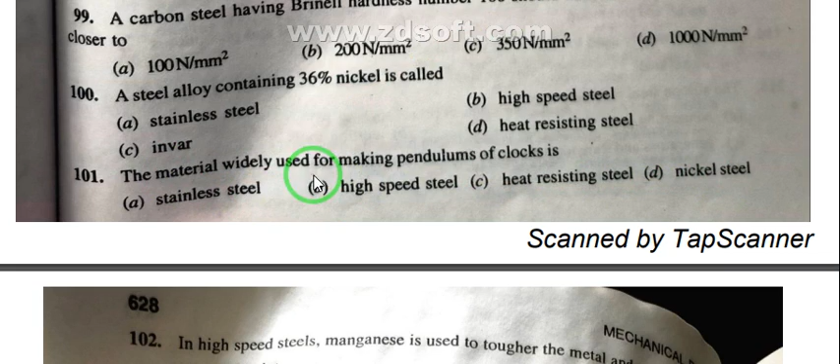In high speed steel, if we use manganese, it is used to toughen the metal and to increase its yield point, critical temperature, melting point, or hardness. The right answer for 102 is B, that is critical temperature. In high speed steel, manganese is used to toughen the metal and to increase its critical temperature.

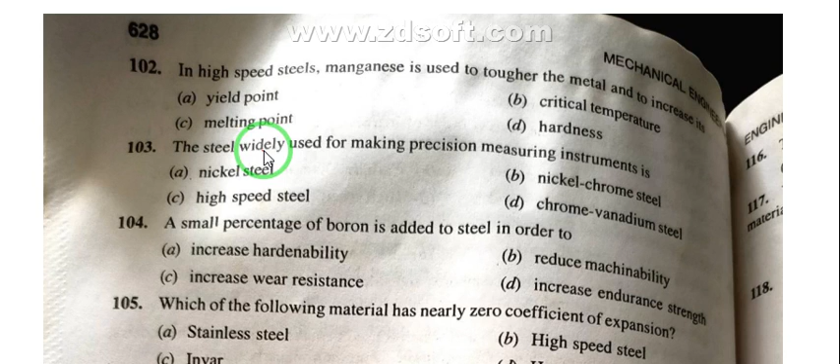Next question 103: the steel widely used for making precision measuring instruments is. Which one is it? It is nickel steel.

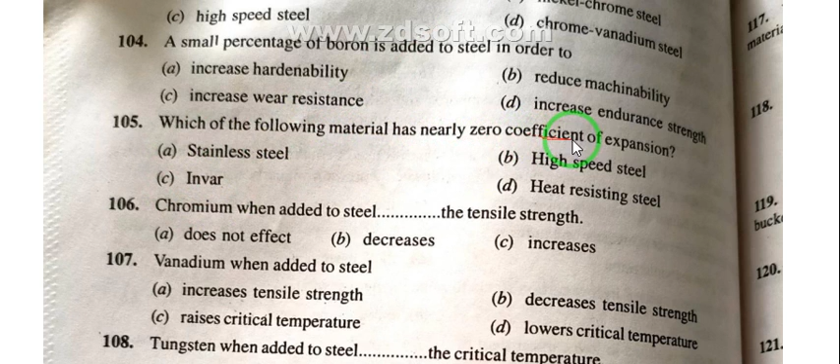105: Which of the following material has nearly zero coefficient of expansion? Options are stainless steel, high speed steel, invar, or heat resisting steel. The right answer is C, that is invar. Which of the following material has nearly zero coefficient of expansion? That is invar.

Question 106: chromium when added to the steel - the tensile strength does not affect, decreases, or increases? What happens when we add chromium? The right answer for 106 is C, that means increases. If we are adding chromium to steel, then the tensile strength increases.

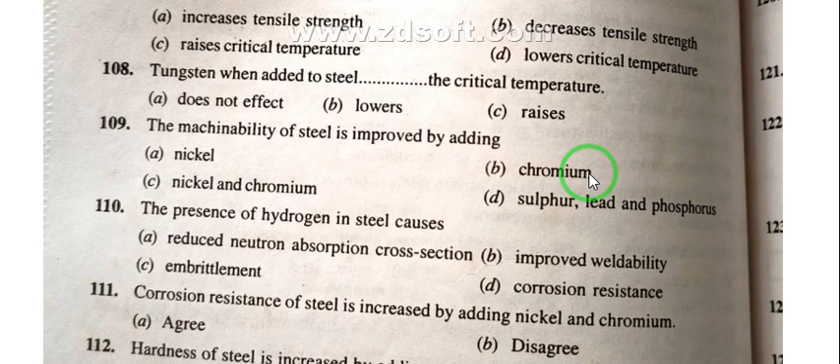Question number 110: the presence of hydrogen in the steel causes - what? Reduce neutron absorption cross section, improve weldability, embrittlement, or corrosion resistance. The right answer for 110 is C, that is embrittlement. Presence of hydrogen in steel causes embrittlement.

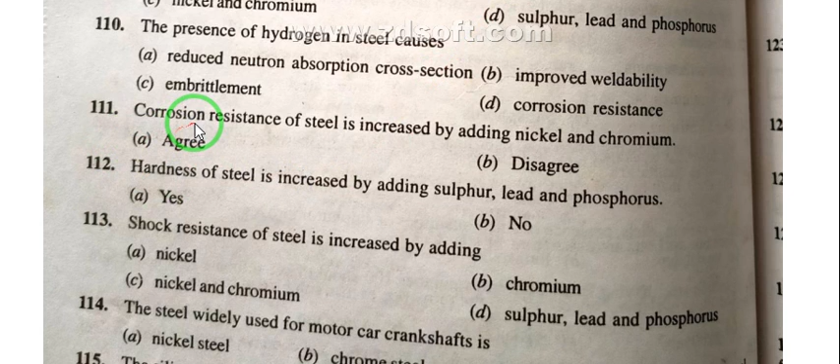Question 111: corrosion resistance of steel is increased by adding nickel and chromium - agree or disagree? The right answer is A, that is the statement is agree, meaning corrosion resistance of steel is increased by adding nickel and chromium.

Question number 112: hardness of a steel is increased by adding sulfur, lead and phosphorus - yes or no? The right answer for 112 is B, that is no.

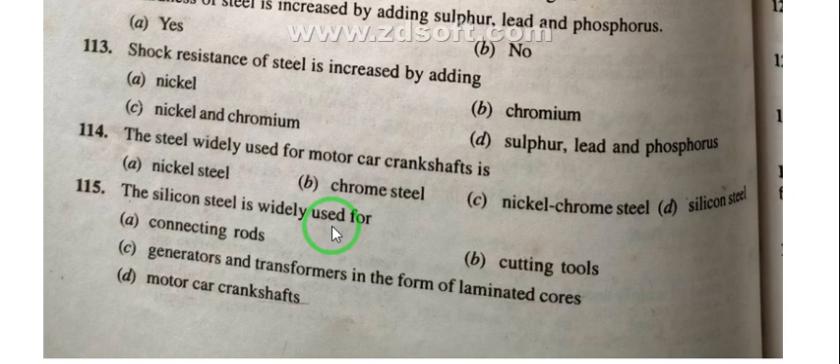Question number 114: the steel widely used for motor car crankshaft is - nickel steel, chrome steel, nickel chrome steel, or silicon steel? The right answer for 114 is B, that is chrome steel. The steel widely used for motor car crankshaft is chrome steel.

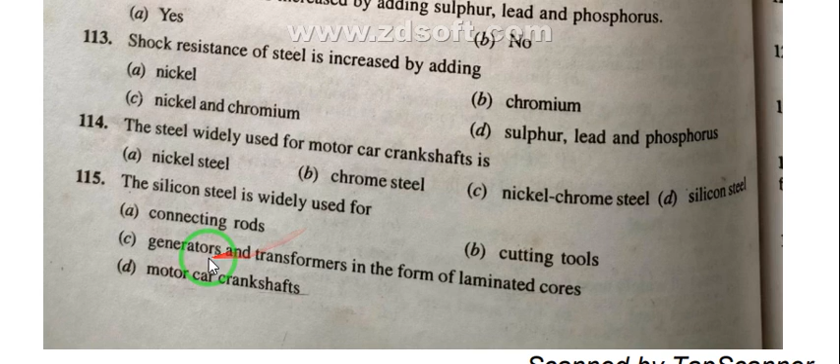Question number 115: the silicon steel is widely used for - what is it used for? Connecting rods, cutting tools, generators and transformers in the form of laminated cores, or motor car crankshaft. The right answer for 115 is C, that is generators and transformers in the form of laminated cores. The silicon steel is widely used for generators and transformers in the form of laminated cores.

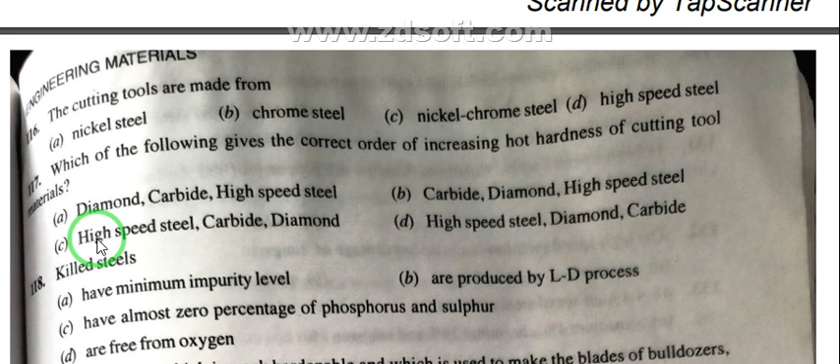Question 117: which of the following gives the correct order to increase the hot hardness of cutting tool materials? The right answer is C: first high speed steel, then carbide, then diamond.

Question 118: killed steels have minimum impurity level, are produced by the LD process, have almost 0% phosphorus and sulfur, and are free from oxygen. The right answer is D: killed steels are free from oxygen.

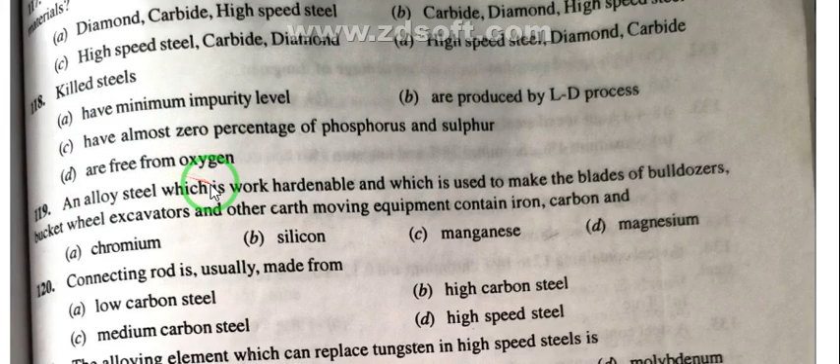Question 119: an alloy steel which is work hardenable and used to make the blades of bulldozers, bucket wheel excavators and other earth moving equipment contains iron, carbon and what? The right answer is C: manganese. So iron, carbon and manganese.

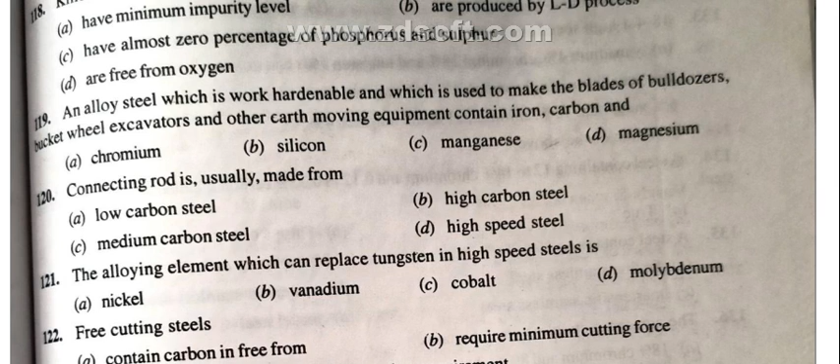Question 120: connecting rod is usually made from low carbon steel, high carbon steel, medium carbon steel, or high speed steel? The right answer is C: medium carbon steel. Connecting rod is usually made from medium carbon steel.

Question 121: the alloying element which can replace tungsten in high speed steel is? The right answer is D: molybdenum. The alloying element which can replace tungsten in high speed steel is molybdenum.

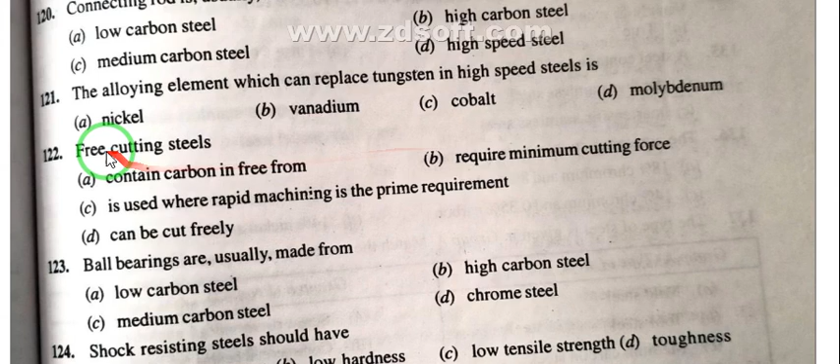Question 122: free cutting steel contains carbon in the free form, requires minimum cutting force, is used where rapid machining is the prime requirement, or can be cut freely. The right answer is C: free cutting steel is used where rapid machining is the prime requirement.

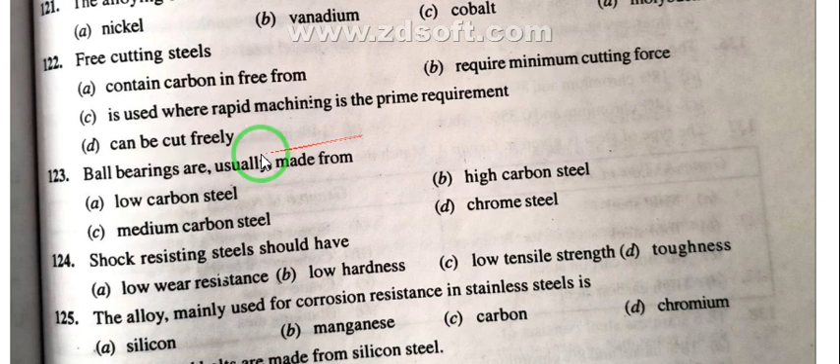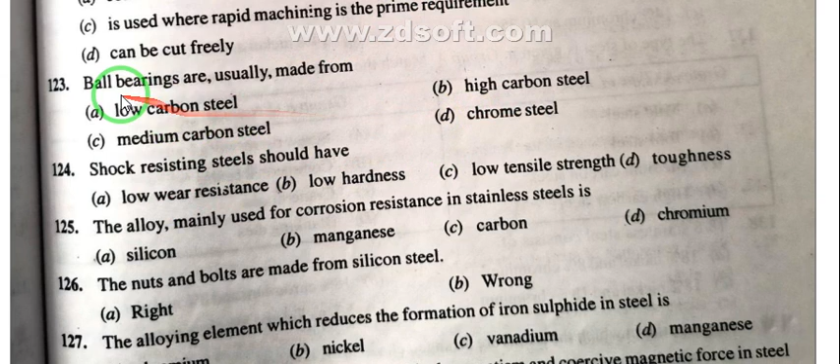Ball bearings are usually made from low carbon steel, high carbon steel, medium carbon steel, or chrome steel? The right answer is D: chrome steel. Ball bearings are usually made from chrome steel.

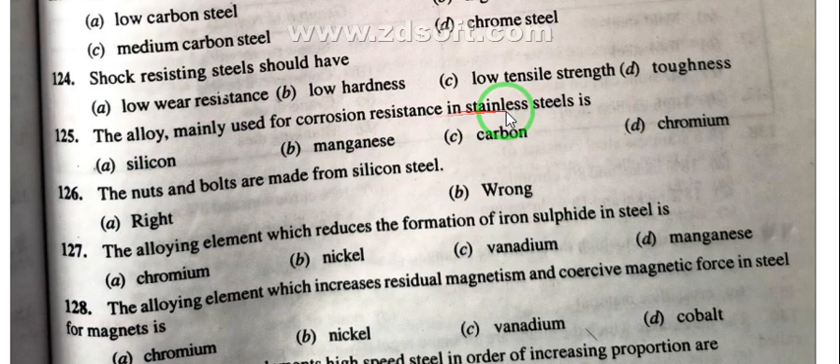Question 125: the alloy mainly used for corrosion resistance in stainless steel is silicon, manganese, carbon, or chromium? The right answer is D: chromium. The alloy mainly used for corrosion resistance in stainless steel is chromium.

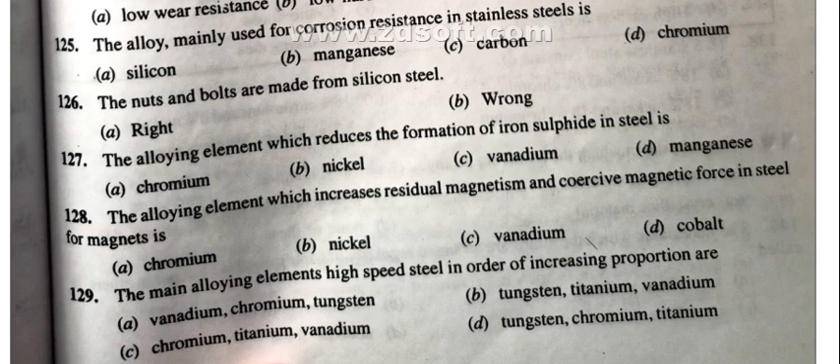Question 126: the nuts and bolts are made from silicon steel. Right or wrong? The answer is B: wrong.

Question 127: the alloying element which reduces the formation of iron sulfide in steel is chromium, nickel, vanadium, or manganese? The right answer is D: manganese. The alloying element which reduces the formation of iron sulfide in steel is manganese.

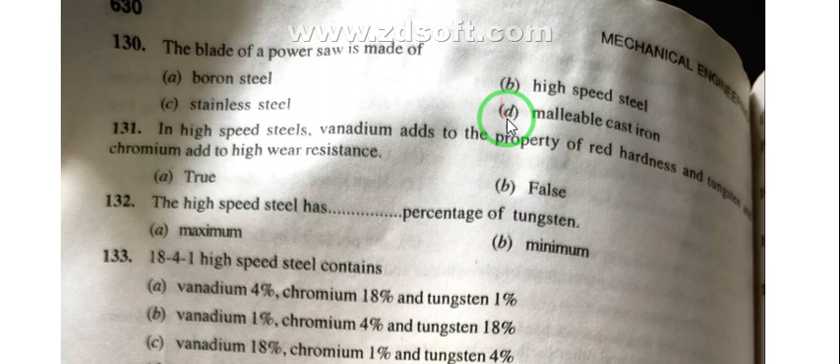Question 131: in high speed steel, vanadium adds to the property of red hardness, and tungsten and chromium add to high wear resistance. True or false? The answer is A: true.

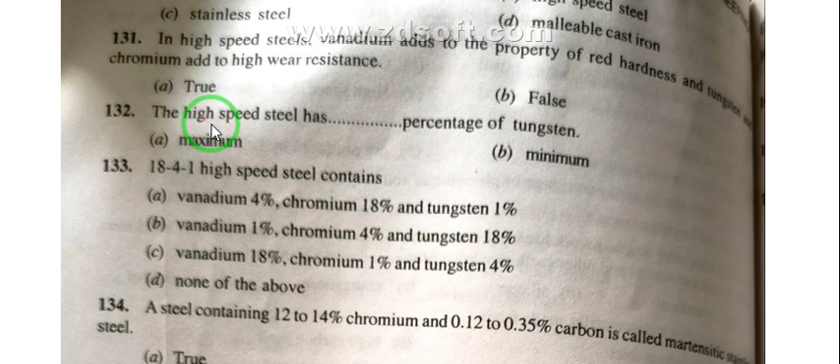Question 132: the high speed steel has dash percentage of tungsten - maximum or minimum? The right answer is A: maximum. High speed steel has maximum percentage of tungsten.

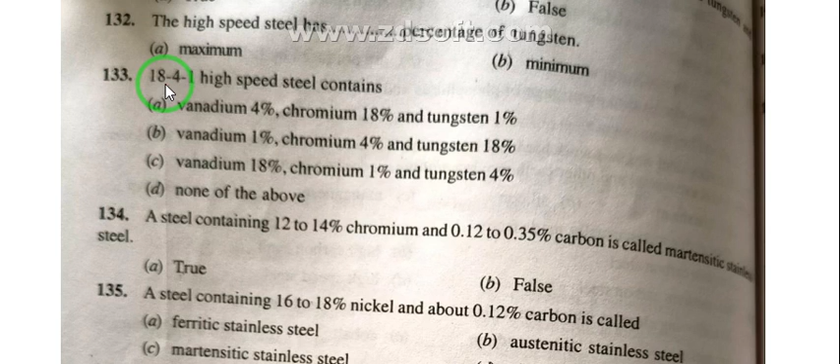Question 133. 18-4-1 high speed steel contains what percentage? That is 133's answer, B. Vanadium 1%, chromium 4% and tungsten 18%. 18-4-1 means vanadium 1%, chromium 4%, and tungsten 18%. Tungsten percentage is 18, chromium percentage is 4, and vanadium 1%.

134. A steel containing 12 to 14% chromium and 0.12 to 0.35% carbon is called martensitic stainless steel. True or false? That is 134's answer, A, that is true. Steel containing 12 to 14% chromium and 0.12 to 0.35% carbon is called martensitic stainless steel.

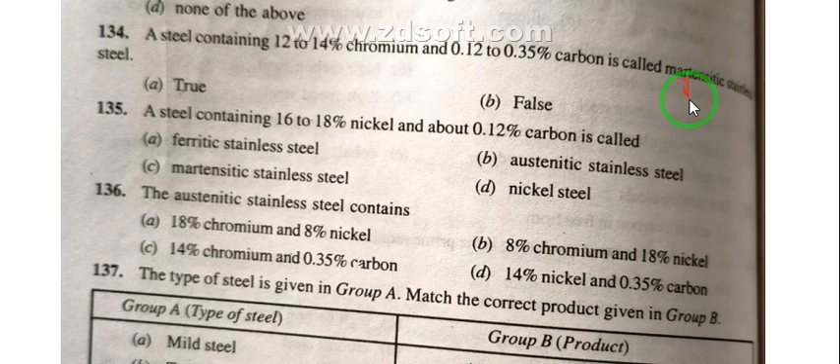135. A steel containing 16 to 18% nickel and about 0.12% carbon is called what? Ferritic stainless steel, austenitic stainless steel, martensitic stainless steel, or nickel steel. What is the right answer? 135's answer is A, that is ferritic stainless steel.

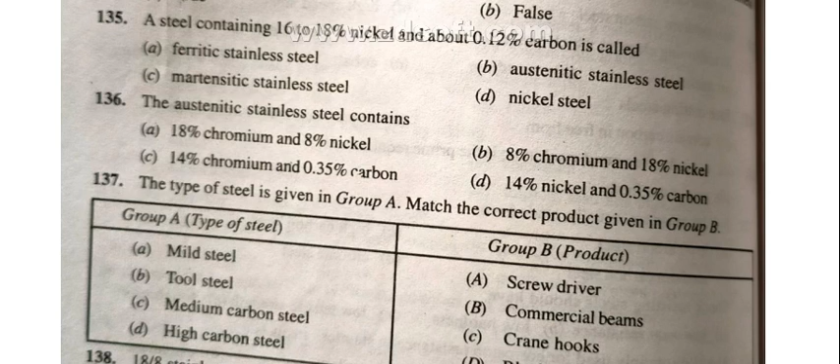Question 136. The austenitic stainless steel contains what? The right answer is 136's A, that is 18% chromium and 8% nickel.

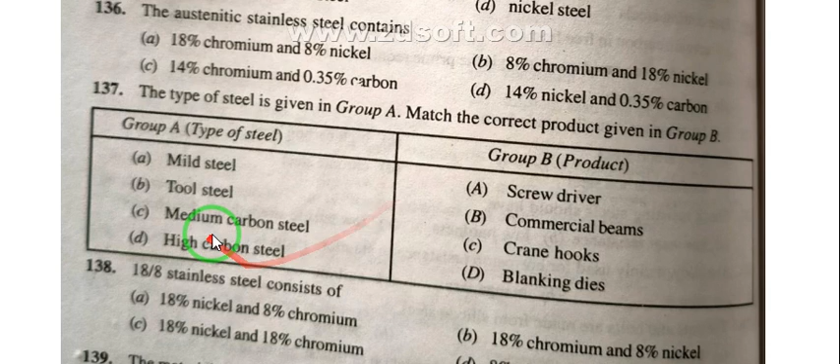137. Match the type of steel in group A with the product in group B. The answer sequence is B, D, A, C. Mild steel matches commercial beams. Tool steel matches blanking dies. Medium carbon steel matches screwdriver. High carbon steel matches crane hook.

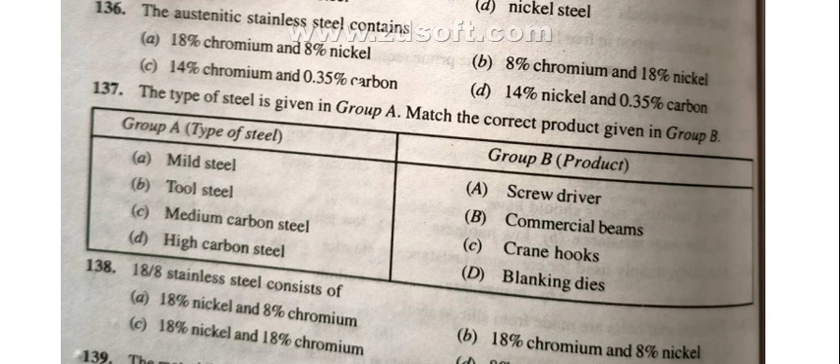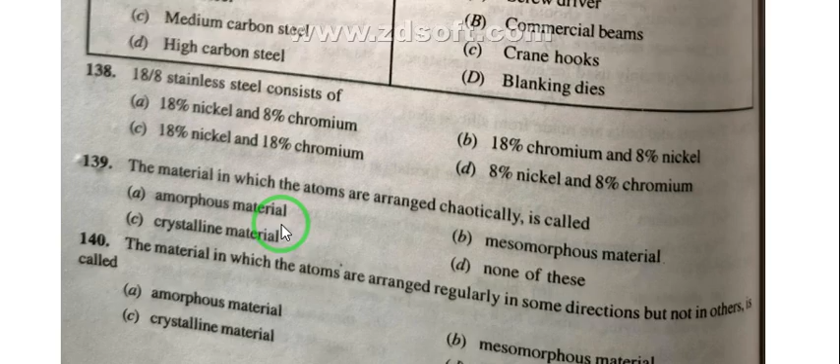Question 139. The material in which the atoms are arranged chaotically is called what? Amorphous material, mesomorphous material, crystalline material, or none of these. The right answer is 139's A, that is amorphous material.

Question 140. The material in which the atoms are arranged regularly in some directions but not in others is called what? The right answer is 140's B, that is mesomorphous material.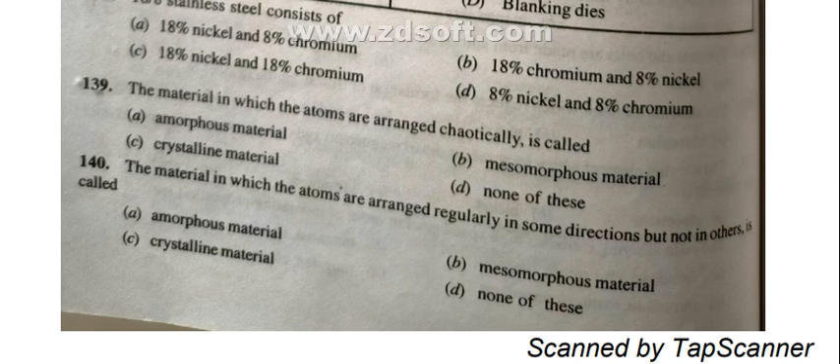Question 141. In crystalline material, atoms are arranged in a definite and ordered manner. Do we agree or disagree with this statement? Question 141's answer is A, that is agree with the statement.

Which of the following is an amorphous material? That is glass is the amorphous material.

Which of the following is a mesomorphous material? What is the right answer? 143's answer is A, that is mica. Which of the following is a mesomorphous material? That is mica.

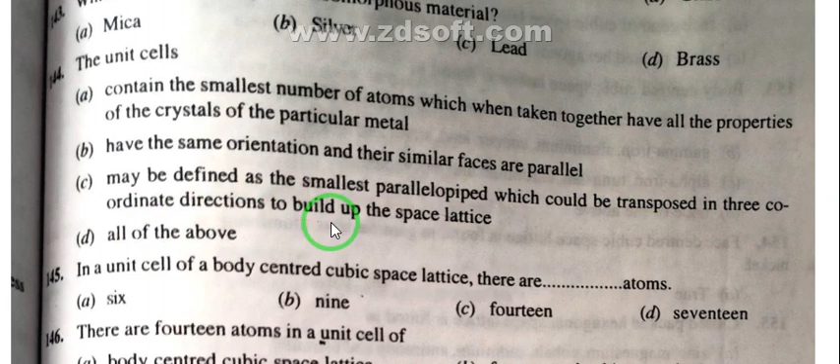The unit cell - you need to tell us about the unit cell statements A, B, C, D - which one is correct? 144's answer is D, that is all of these: the unit cell contains the smallest number of atoms which when taken together have all the properties of the crystal, the particular metal have the same orientation and their similar faces are parallel, may be defined as the smallest parallelepiped which could be transposed in 3 coordinate directions to build up the space lattice. That is all of the above.

Question 145. In a unit cell of the body centered cubic space lattice, how many atoms are there? You need to tell us - in body centered cubic, 145's answer is B, that is 9. In a unit cell of a body centered cubic space lattice system there are 9 atoms.

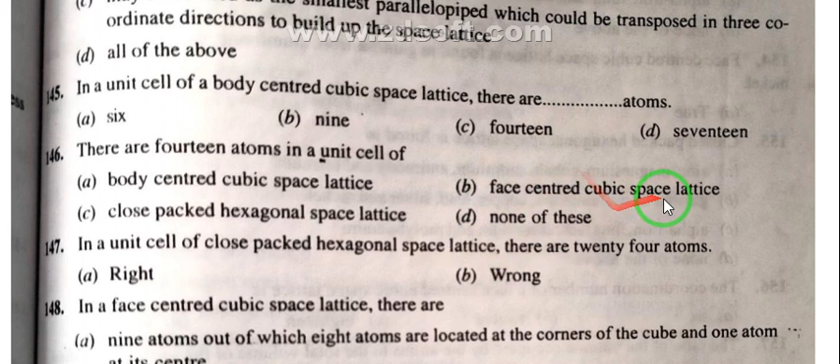147. In a unit cell of a close packed hexagonal space lattice there are 24 atoms. So what does this indicate - is it right or wrong? 147's answer is B, that is wrong. In a unit cell of a close packed hexagonal space lattice there are 24 atoms - wrong.

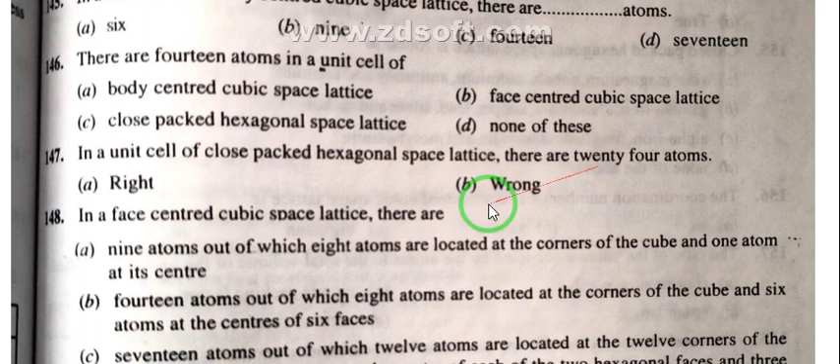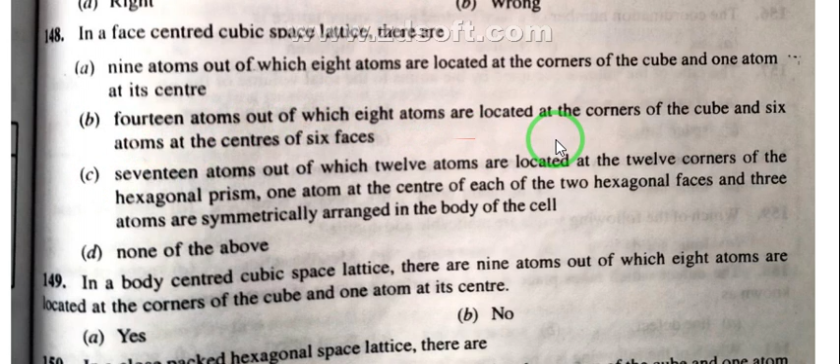Question 148. In a face centered cubic space lattice, what is the statement? 148's answer is B, that is 14 atoms out of which 8 atoms are located at the corners of the cube and 6 atoms at the center of the 6 faces.

Question 149. In a body centered cubic space lattice there are 9 atoms out of which 8 atoms are located at the corners of the cube and 1 atom at the center. Is this statement yes or no? 149's answer is A, that is yes.

150. In a close packed hexagonal space lattice there are - what is the right answer? 150's answer is D, that is none of the above.